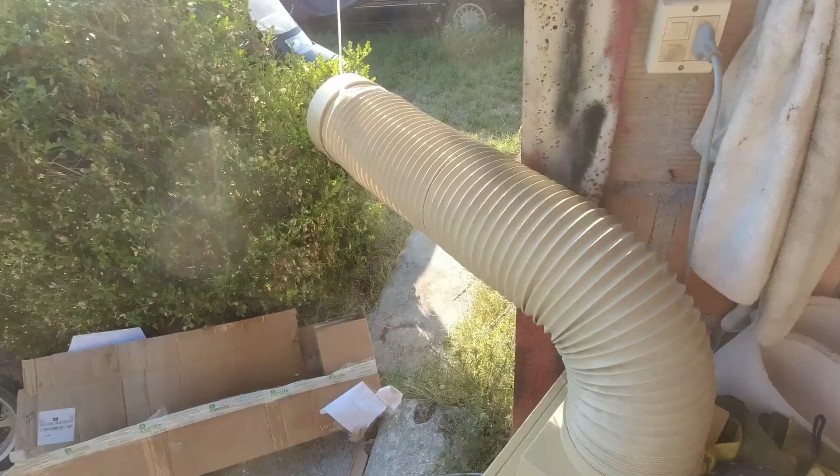This little thing here helps me cool down the place while I work, so cool. It was free, so why not?

Okay, so what we're gonna do today: first of all, a good service, because I don't know when the last one was done. I mean, I do kinda know because there is a sign in the engine bay and I'm gonna show you later.

We're gonna try to address the check engine light in the car using an OBD reader.

And we're gonna clean the interior because it's kinda clean, but it's been in the hands of the same person for over 20 years, and I don't know what it did to the car.

I won't film much of the cleaning the inside because it's pretty boring, and you already saw it in many other of my videos. So I'm just gonna tell you what I'm gonna do.

I already put that yellow device in there, which is an ozone cleaner. It helps kill all the bacteria and all the germs in there, and it erases all the odors and smells within the car. So I'm just gonna take out the seats and basically strip down everything, use the extractor, clean the seats, clean the interior, vacuum everything.

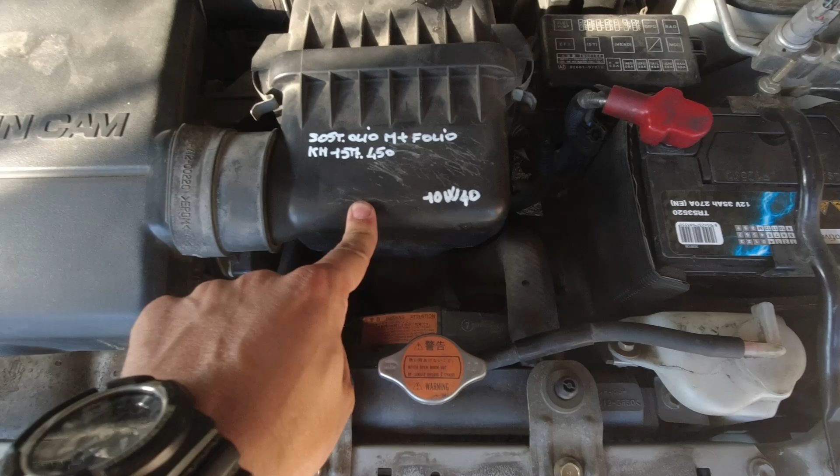Here is the engine bay. It's a little bit dirty, but not even too much. As we can see here, this is something I hate so much, seeing this stuff here.

It basically says they changed the engine oil, plus this doesn't mean anything. It's probably meant to say they changed the filter, the oil filter too. They did this at 157,000 kilometers, which is 2,000 kilometers ago, so it should be all pretty new.

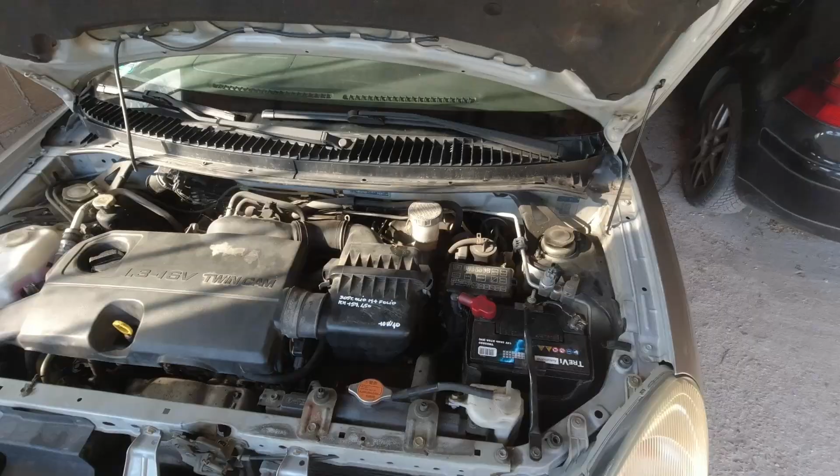Not so sure they changed the air filter, I'm not even sure. And yeah, this is the oil they used here in Italy. Everyone on every car uses 10W40. Like every car I bought, whatever the manual says, whatever it says on everything, our mechanics always fucking use 10W40. I don't know.

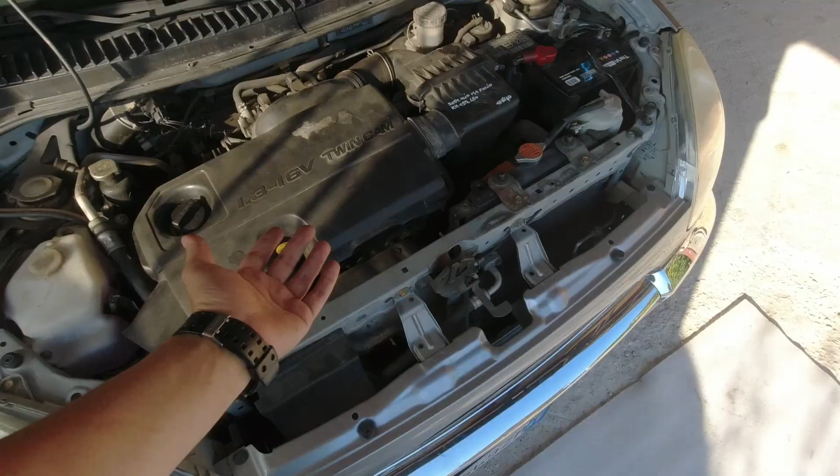It's a disease, I don't know. How much does it take in 2026 to check online which kind of oil this engine needs? 10 seconds, something like that.

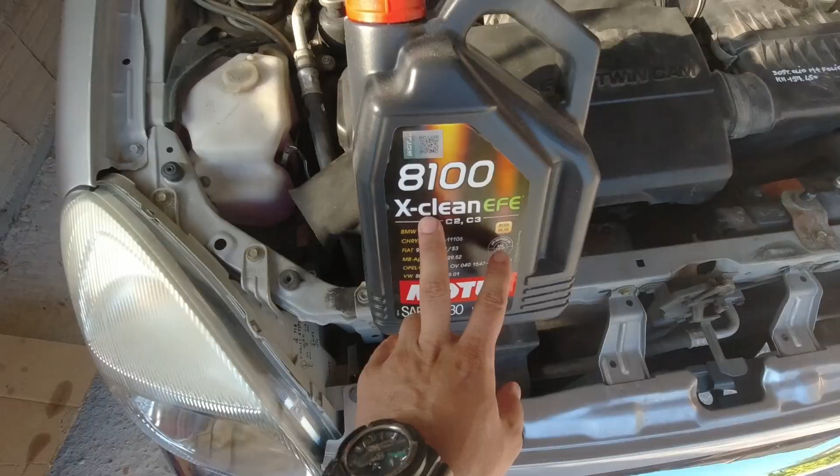So I don't know, but we're gonna change the oil. We're going for the same engine oil I use on the Yaris, which is Motul 8100 X-Clean EFE, a 5W30. I bought 2 of these, 5 liters each, because I had to do the service on the Yaris that I did yesterday.

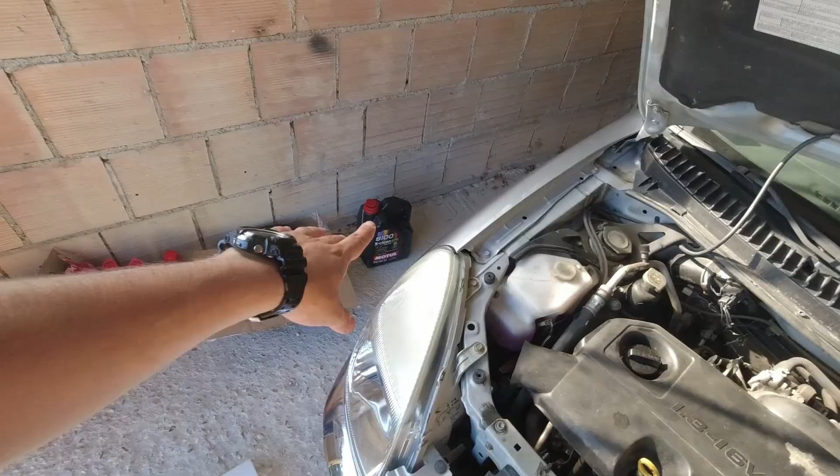Today I'm gonna work on this. I'm gonna use the oil which remains in there, plus I have another jar over there. I'm gonna change the oil, change the air filter, and change the oil filter, which is down there.

Since we are here and I didn't even jack up the car, we're gonna drop down and see how accessible everything is down here, because on the Yaris the oil filter is behind the exhaust manifold. It is very hard to get to. I hope this is better, but I didn't even check yet.

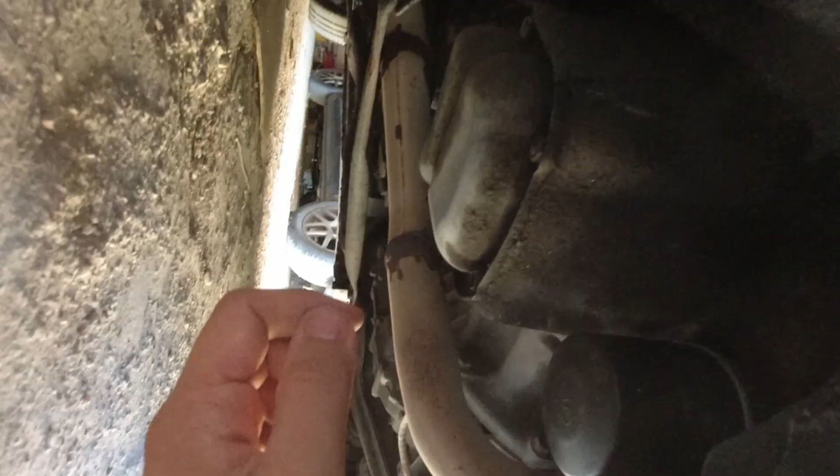So here is the oil pan, and that is the bolt, the drain plug, which is pretty easy to get to. And this is the oil filter, which is in a perfect position. I can do whatever I want with it, and I can even use a tool to take it out.

Seems very new to me. So yeah, they changed this one through 2,000 kilometers ago. The oil is draining from the bottom.

I was kinda preoccupied because this bolt, the sump bolt, I don't know, there's something wrong with the threads I think, because it was very stuck on, and I had to turn it a very long time before it came loose. So I don't know.

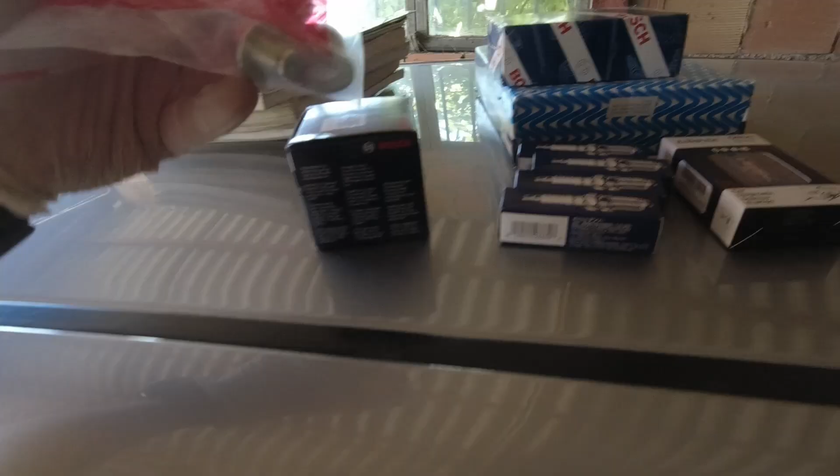Thank God, when I change oil in my car, most of the time I take these ones new. The problem probably is in the thread on the oil pan, not on the bolt, but whatever. I got one of these new, so we're gonna use this one instead of that one, because the gasket on that one is pretty shit anyway.

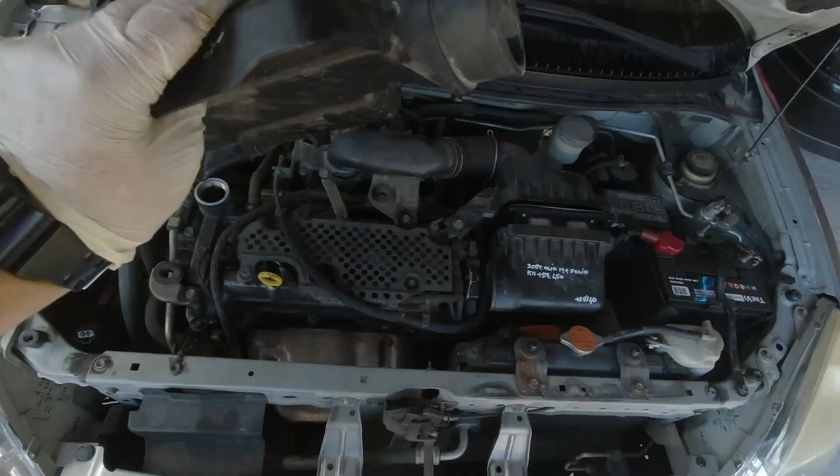Okay, we're draining the oil, and while we're draining the oil, I was able to take out this plastic cover here, which functions as an intake tube, kinda weird. And this is the situation.

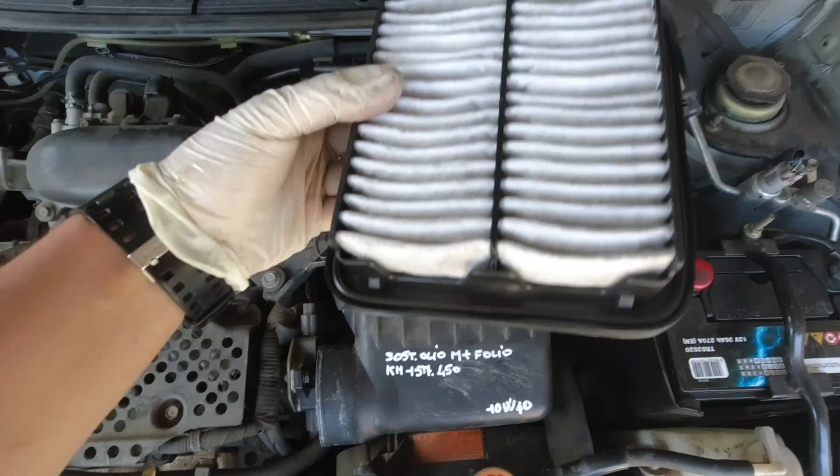I can open this now, take out the filter. Let's see how it is. Kinda dirty. Yeah, this wasn't changed at this time, at these kilometers. I don't think so. This is older.

Let's see if there is a date somewhere. 2010. So yeah, this probably hasn't been changed in quite a few years. I don't know why people do that. This thing costs like 10 euros. I don't know, people are weird.

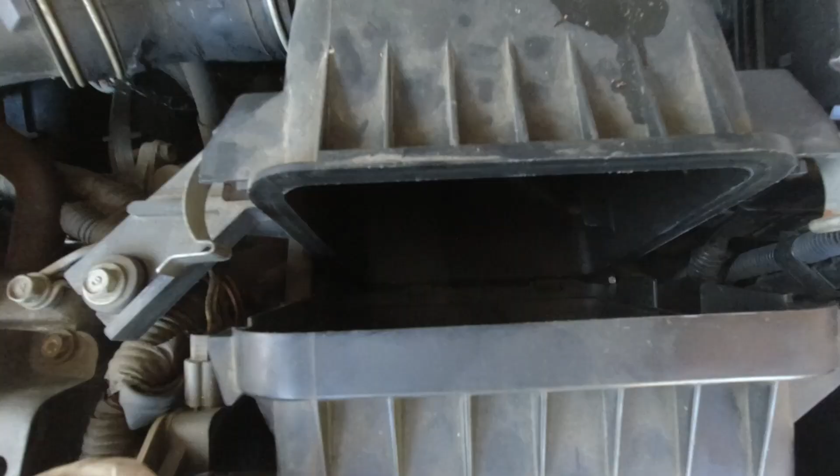Okay, so we're gonna change that. I'm gonna first vacuum in here, but it's pretty clean honestly, I don't see any debris. Put new filter here, close this one.

I wanted to change spark plugs too, but it seems quite a job to take them out. There is a broken clip here, but okay.

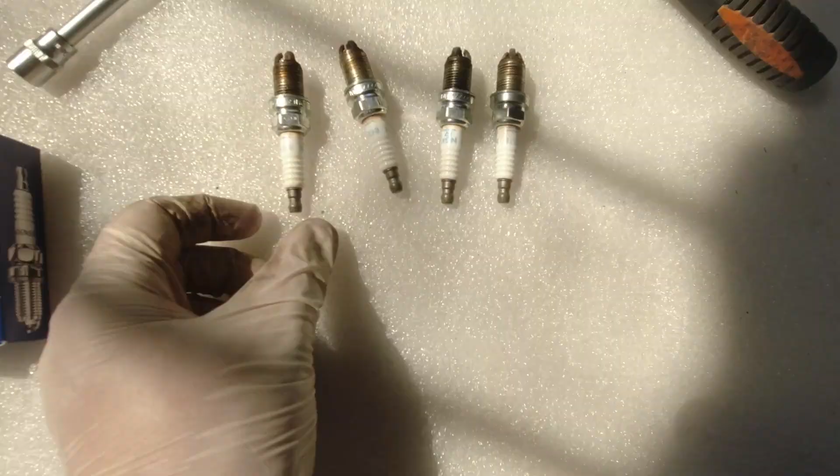Let me see if I can take this off, the coil pack, and see if I can change the spark plugs too. I should be able. Okay, I managed to take out this cover here, this plate. I took out the coil packs pretty easy, and I took out the 4 spark plugs, which are down here. They are NGK ones.

The code is right here: BKUR6ETB10. The tip is like this. This is very unusual, but I hope I got the right one.

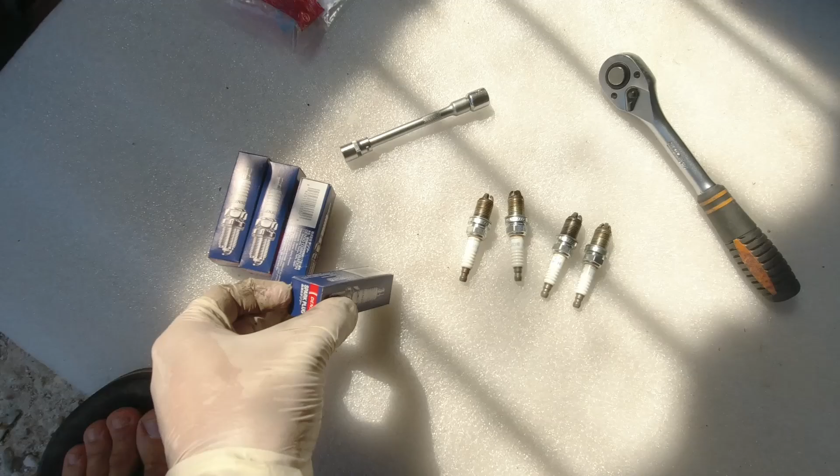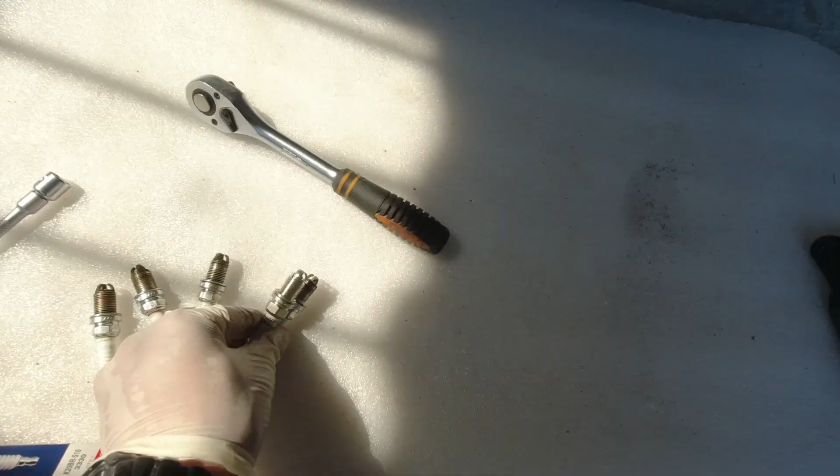I hope so, because I couldn't find equivalent NGK ones, and I got some Denso ones instead. That should be okay, the tip is the same. Let me check one to another. Yeah, the length is the same. They're the same. Okay, cool.

Got the right one. Weird thing was, when I was checking on various sites like Autodoc and etc., they told me to pick some different spark plugs. But I wasn't so sure because I checked the manuals over there, and the manuals stated different spark plugs than the one listed on Autodoc for this engine. So I trusted the manuals, the original Daihatsu ones, and thank God I did, because these Denso ones are the right ones.

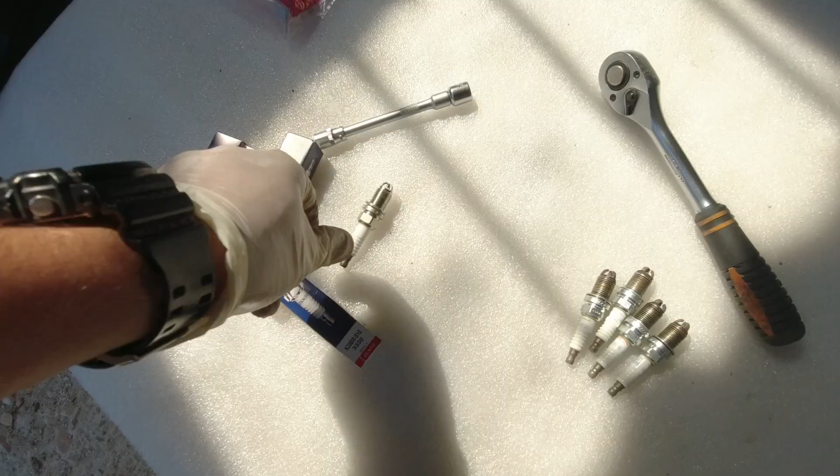Cool, so I'm gonna put the new ones in, and we're gonna continue. So guys, I had to raise the car a little because I needed more space down here, down to this oil filter.

An oil filter in this position should be so easy to access, right? And it kind of is, you just need to screw or unscrew it. But the mechanic that fitted this filter tightened it so freaking hard I had to destroy it to take it out. I don't know, mechanics that tighten oil filters to this level need a special place in hell.

While I was under here, I was seeing something weird up here, white, and I reached out with my hand and a screwdriver to help me. And what the fuck did I find here? What is this?

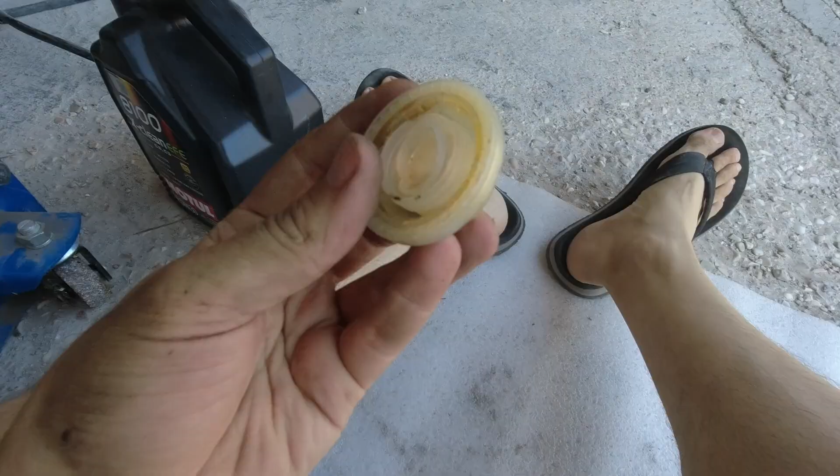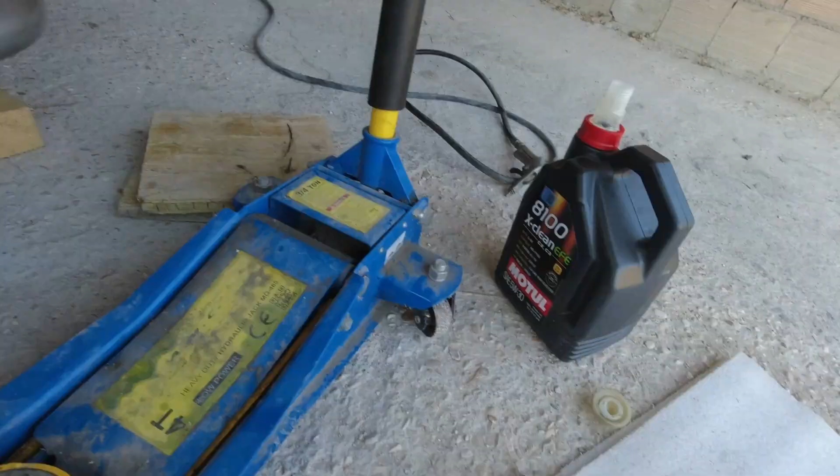Looks like some cap for an oil tank, something like that, I think. If you do a service on your customer's car and you drop the oil cap behind the bumper, what about taking it out? Huh, too hard, right? I did it in my driveway with my back on the ground with like 30 centimeters of space. Imagine doing it on the lift, how hard would that be, right?

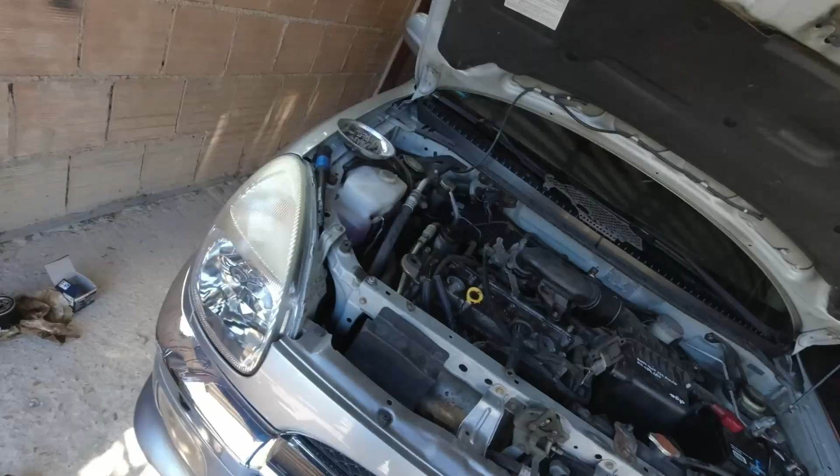Okay, since we're talking about weird things and weirder things I'm finding on the car, this is something very strange. It never happened to me before.

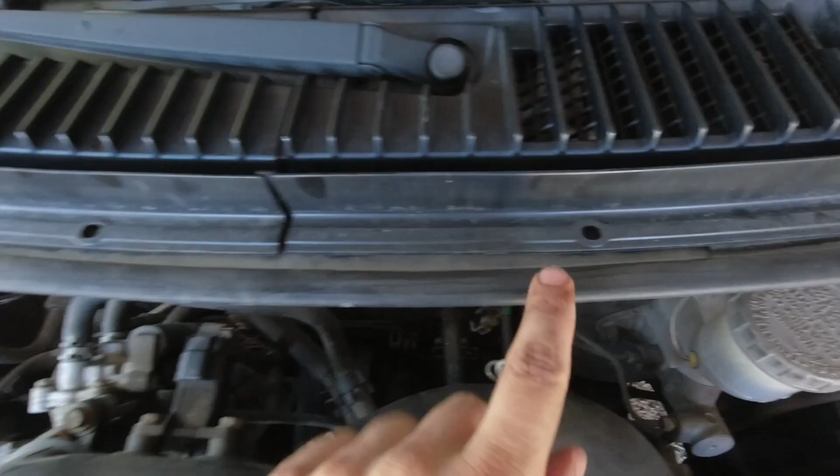Do you see these two covers? The cover is divided in two parts, first of all. As you can see, here it's divided. I was putting that there and I saw it moving, right? Do you see it moving? Then I said to myself, what the fuck is happening here? And what's this stuff here, dude?

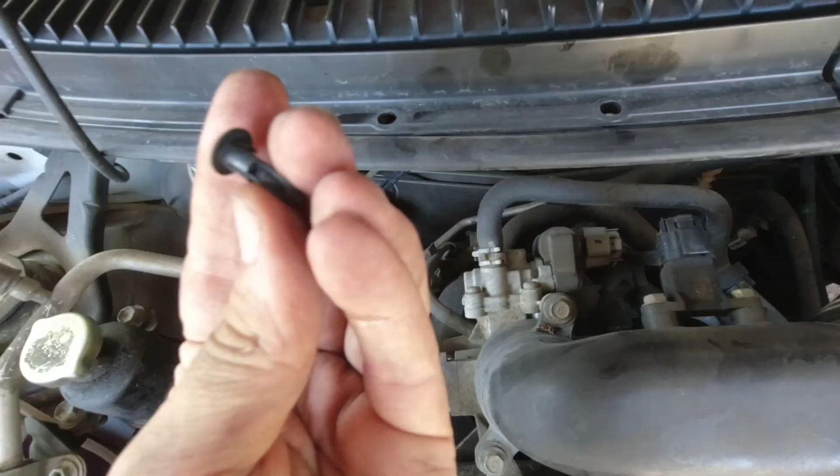I mean, there's no clips, even back there. What the fuck? What the fuck happened here? There are like 3 clips holding the whole thing. Why? I mean, if you take it out, put them back, it's not that hard, right? Even the ones that are in are destroyed. These are useless. What's this stuff?

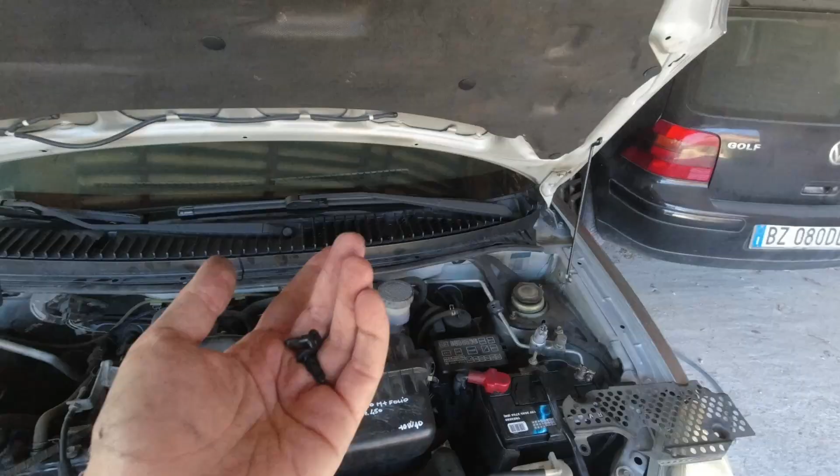This thing is flying. I don't know, dude, the more I look into the car, the more weird things I find. I kind of like it, because I'd like to move more stuff and see more weird things, I'm curious. But I'm also scared, because Daihatsu here in Italy are sold no more, so finding this stuff will be a nightmare. I can try some Suzuki parts I had for the Swift that I bought when I took out the carpet, some of them broke and they're kind of similar, but I don't know. I can try some Chinese ones, but they last like 2 days before they break.

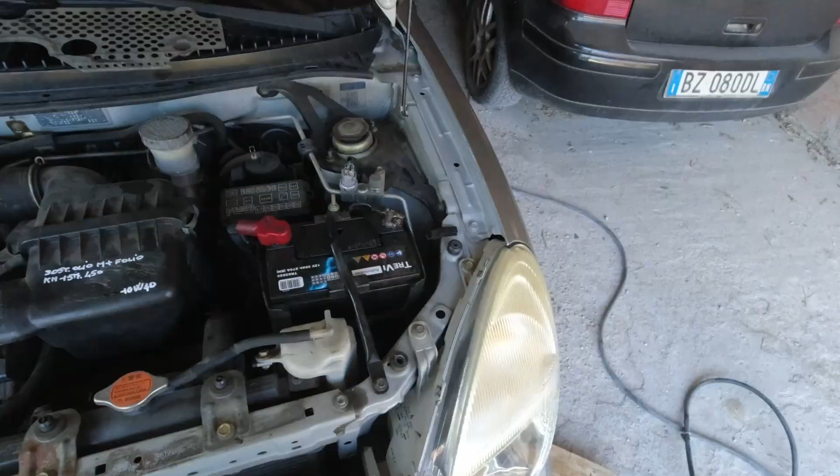And now that I watch all this kind of stuff, the ABS sensor and the check engine light, I think there's not any major issue with them. It's just something weird happening here.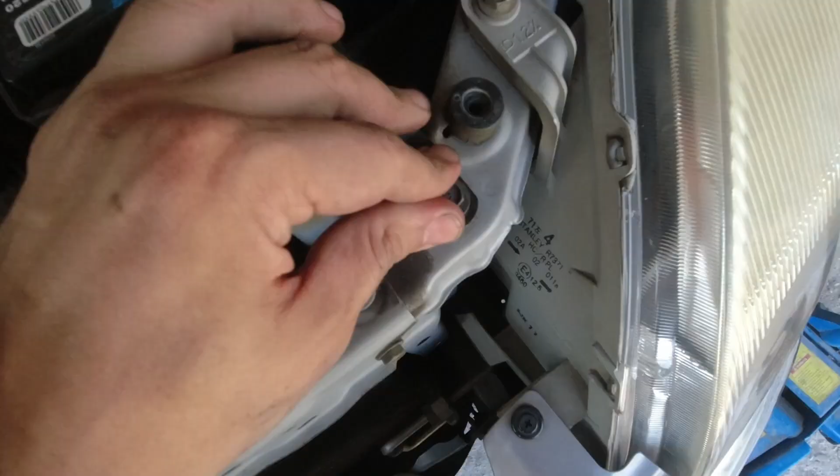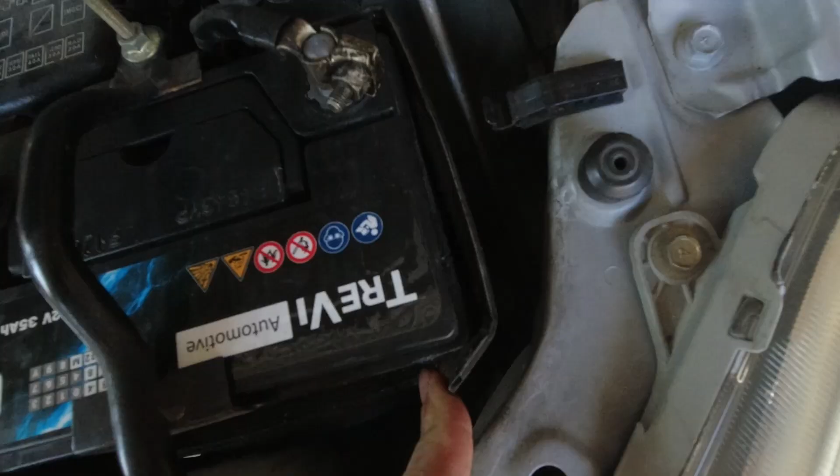For example, the dude, before buying the car, he changed the battery. Look at this thing, fix it for fuck's sake, fix it, turn this fucking bolt, fix the fucking battery, dude. What's this? Do you see the cover of the battery all around? It's plastic with foam. I don't think this is Daihatsu, I don't think so. I'm pretty sure this is some kind of weird stuff the previous owner put in, don't know why.

I need to find out what's happening here. And the ABS light came on. I talked with the previous owner and he told me he changed the battery the day before I got to pick up the car. He changed the battery, and when he turned on the car, the ABS light popped up for the first time ever, it wasn't there before. So I don't know what the fuck he did.

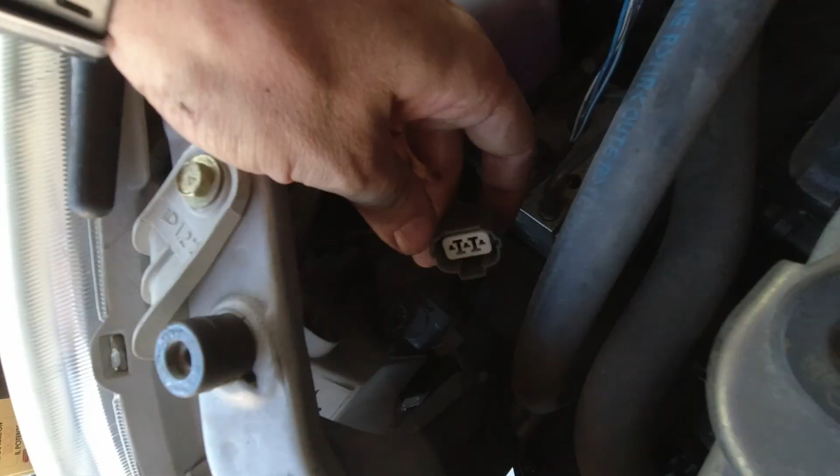For example, look what I found here, a connector disconnected. Why? This is a headlight, yeah, it's the motor for the headlight. Why is it disconnected? What happened here? This is the ABS control module. So I think someone messed with it, I'm pretty sure something happened here.

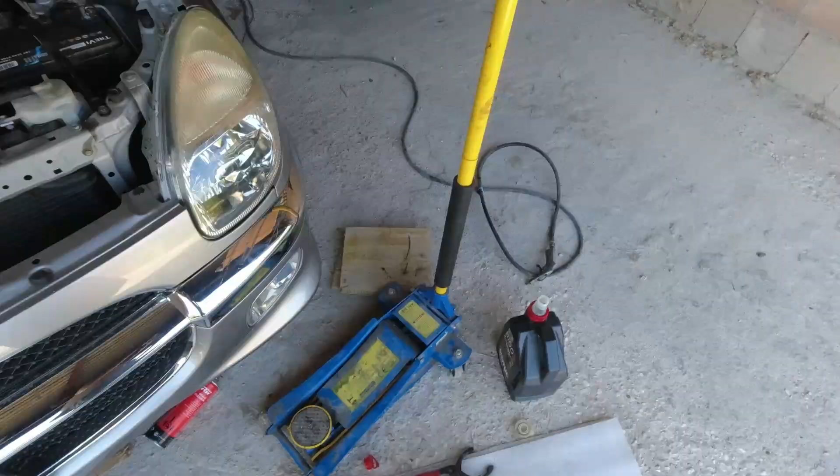And really, I'm scared to look around the car, because I'm pretty sure I'll find more weird stuff.

Quick update, the engine is turned over. I let it warm up a little and checked the oil level in a few minutes, it was about to full. But as we can see here, what the fuck? The ABS light, which was there, disappeared.

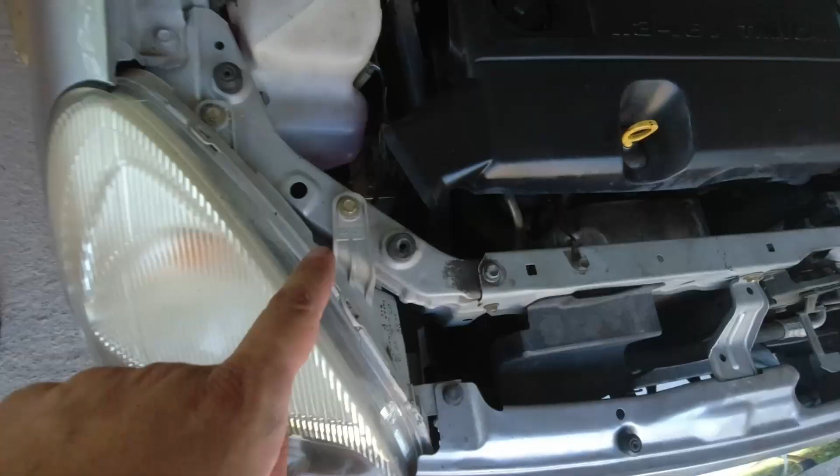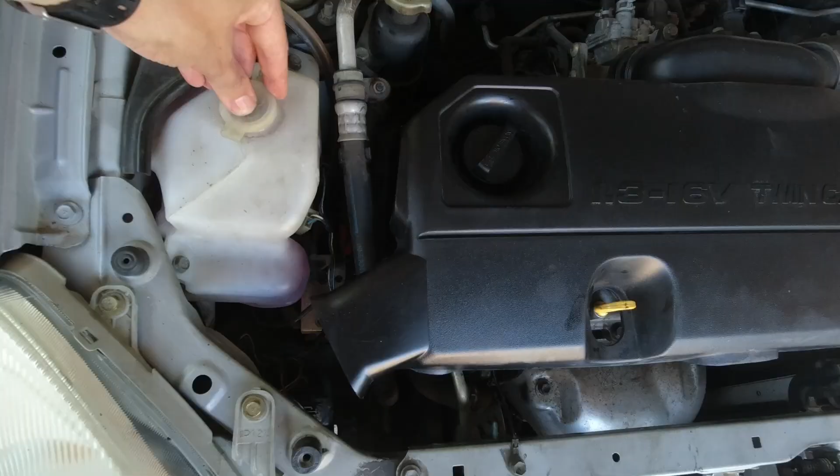I'm confused, I'm really confused, really. Could it be the connector there, which was disconnected? But I'm pretty sure that goes to the headlight, so I don't know. Now that I think of it, the dude who sold me the car told me he filled up the washer fluid bottle. So that connector was right there, he maybe put something in and accidentally disconnected it. I don't know, maybe that's the case, I don't fucking know.

Let's give it a rev.

So smooth, this engine. I keep an eye on the ABS light to see if it pops up again, but for now we consider it fixed.

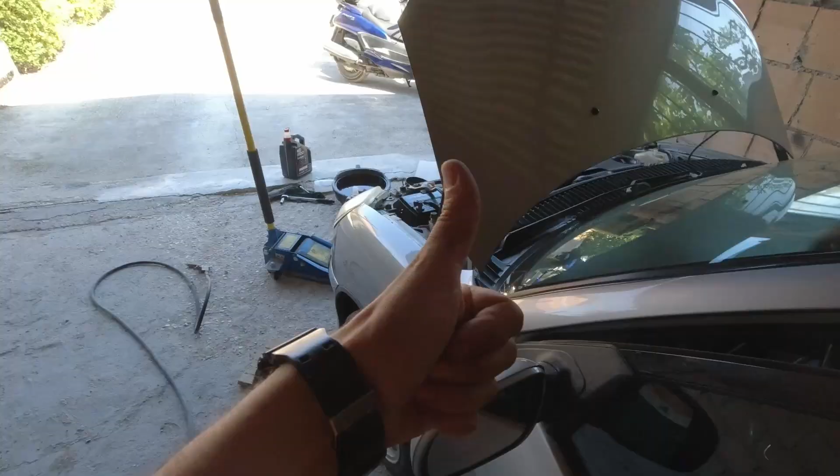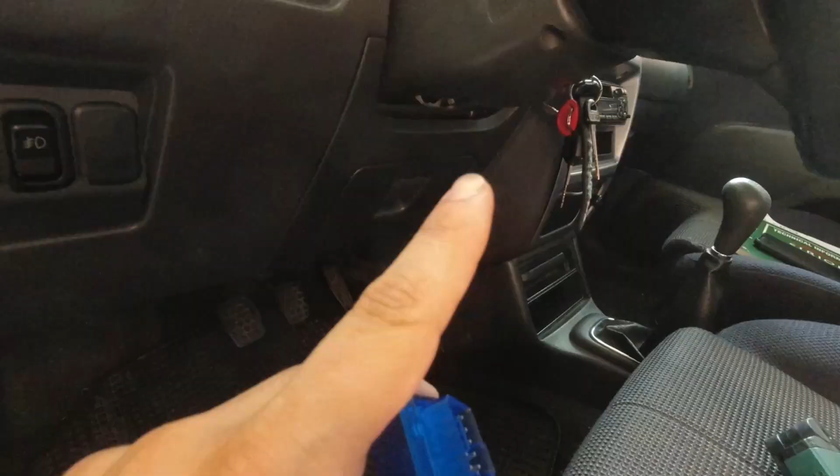For now, we're here to connect this cheap OBD2 sensor, or to be precise, OBD2 reader. We connect it to the OBD2 port right there, turn the key on, and check with the app on the phone what it's telling us, if it tells us anything.

This was bought on Amazon for like 10 euros. It was the cheapest one because I'm that cheap.

So the OBD2 port is located down here. Let me get some light. It's like down up there. I hope you can see it, like here.

So I'm gonna just connect this to there and see what's going on. This is the app, gonna open it up. Okay, it's ready to be connected.

Now I just need to turn the ignition on. Then we hit connect, I think. Yeah, Bluetooth on. It's trying to connect. It did connect.

Okay, now we got a few options here. We can try with the diagnostic, which is this one. We take all this stuff off, I think, and we go only for OBD2. I don't know what all this other stuff is.

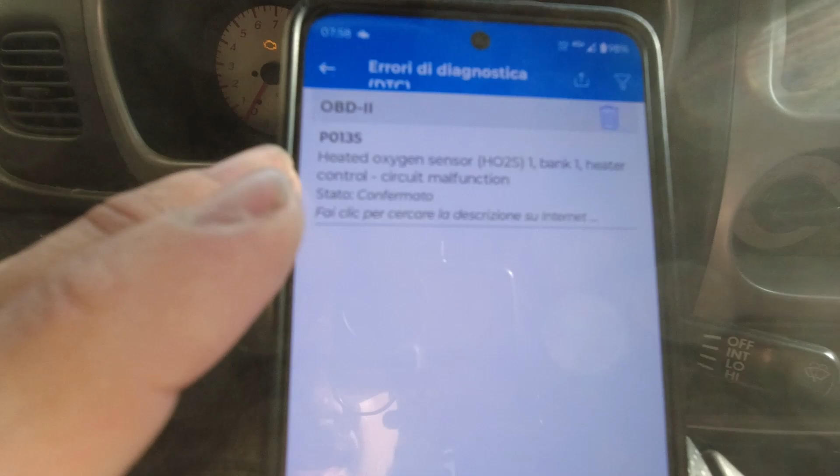And we just go read. Let's see if it finds anything. It found something. Code is P0135, heated oxygen sensor 1, bank 1, heater control circuit malfunction, confirmed.

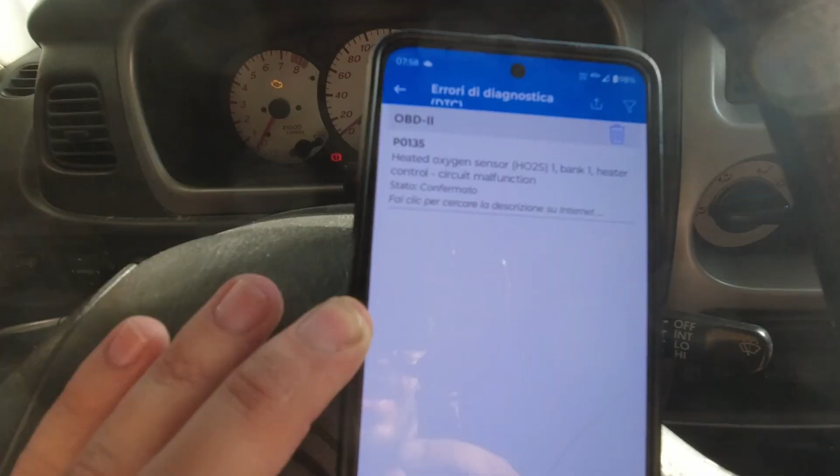So we got this code now, and you can look it up through the app, but we can also check the manual if something is related to this code here, and we go from there.

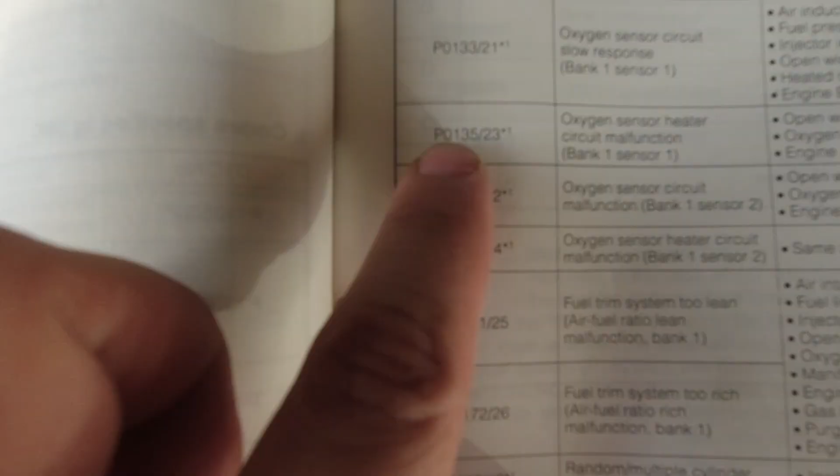This is the official workshop manual. We've got the various codes, and if we scroll down and find that code, P0135, as we can see, it says the same thing: oxygen sensor heater circuit malfunction, bank 1 sensor 1. Open wire or short in heater circuit of oxygen sensor heater, engine ECU.

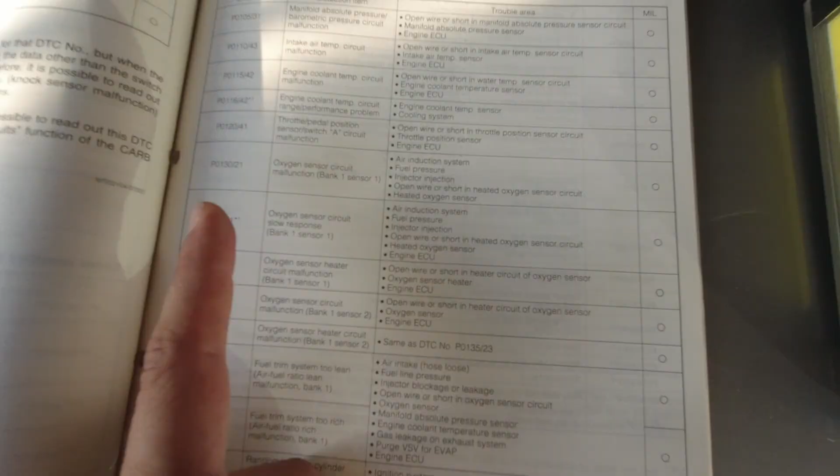Although we can write off the ECU, because everything else works, so I don't think the ECU has a problem. It's probably just the sensor or the wire.

As we can see, we have two oxygen sensors, bank 1 sensor 1 and bank 1 sensor 2. Ours is sensor 1, which is the problem.

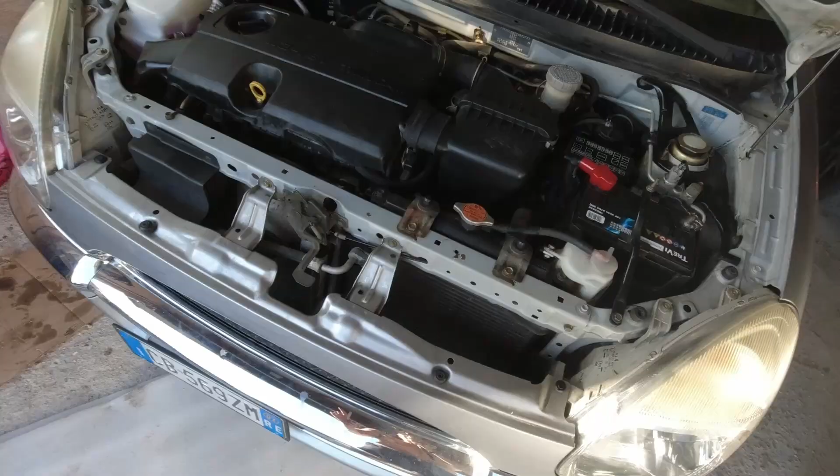I'll show you why. We're here in the engine bay again, and I'm gonna show you the O2 sensor I already found, which was the one down here.

I don't know if you can see it, it's right there. This is the wire. This isn't too bad to work on, but I think, since I can't see anything after that, this is sensor number 2, which is not the one that's faulty.

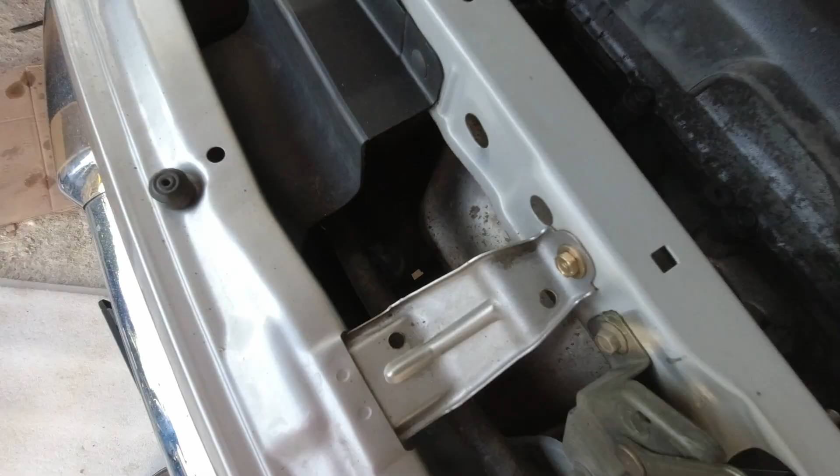The other one should be before that, and I think I saw a glimpse of it. I don't know, but I can see the wire here. Let me put some light. The connector is there, this is the wire, and the O2 sensor, I'm touching the wire, is down here under the heat shield.

Now I don't see it, literally. I can't fucking see it, but I can feel it by hand.

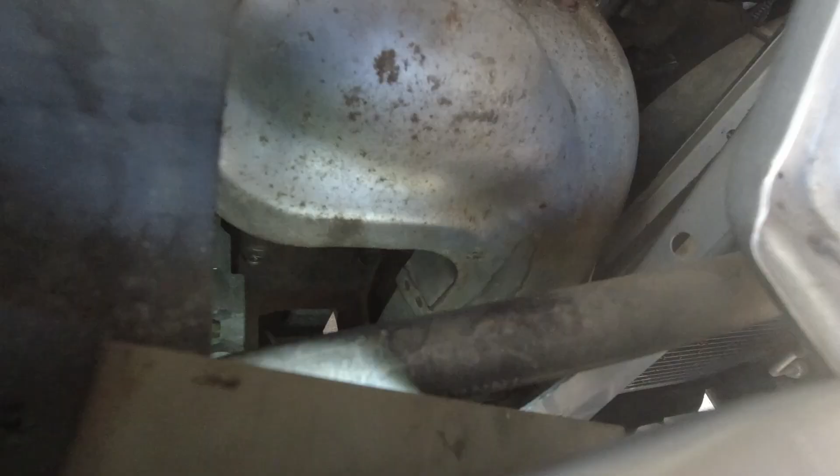Now the real problem is, how the hell do I take it out from there? Usually these things are really stuck on, because they went through a lot of heat cycles, and you've got to have a lot of access and a big ass wrench to take them out. That tight spot there will be a nightmare.

So what's the plan here? I fear that my only option is to take out the bumper to get some space, because I can't get there from any angle.

I mean, here I've got the grill, the bar, this plastic shield, heat shield, AC lines, more lines, the alternator I think. So I literally have no space, and I can't see it.

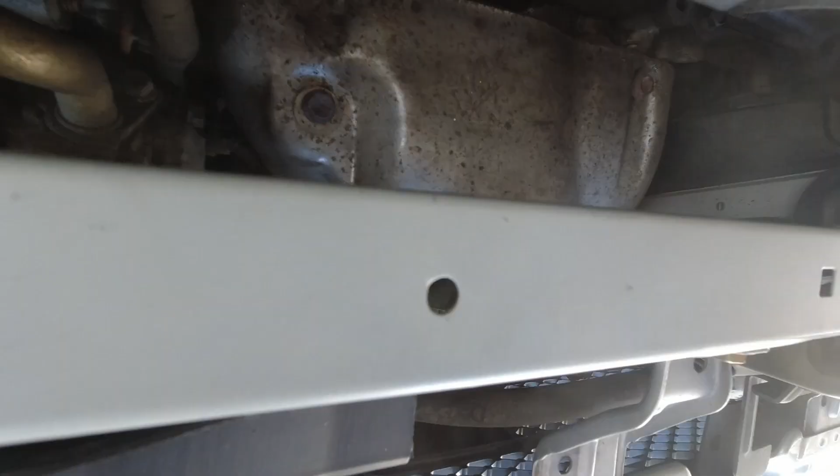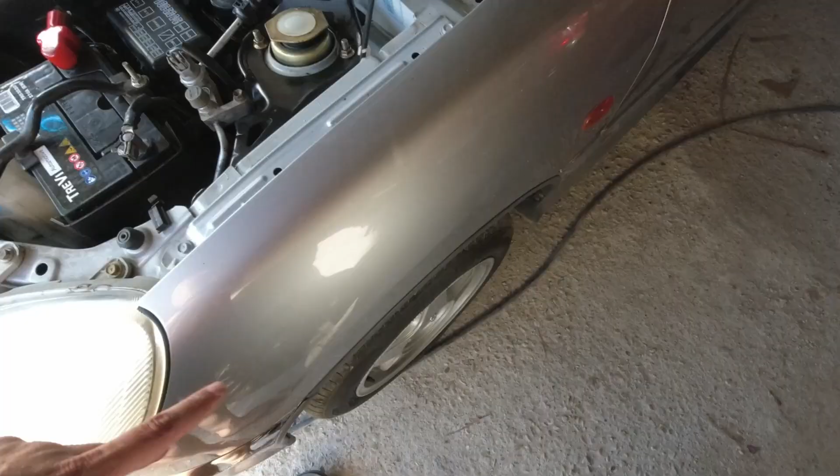So I don't know, so what I'll try to do is take out the bumper. I can only see some bolts here, here, here, here, and it should have some on the bottom. I sense some screws in here. So I'm just gonna try to take all these bolts and screws out and take off the bumper, and go from there.

Okay, so I took out these two clips, which are different from one another. Nice, these two bolts. There is another one down there, very deep inside. Then we got some clips from the bottom to secure the bumper to the chassis, but as we can see, since this bumper got taken off a few times, don't know if you can see here.

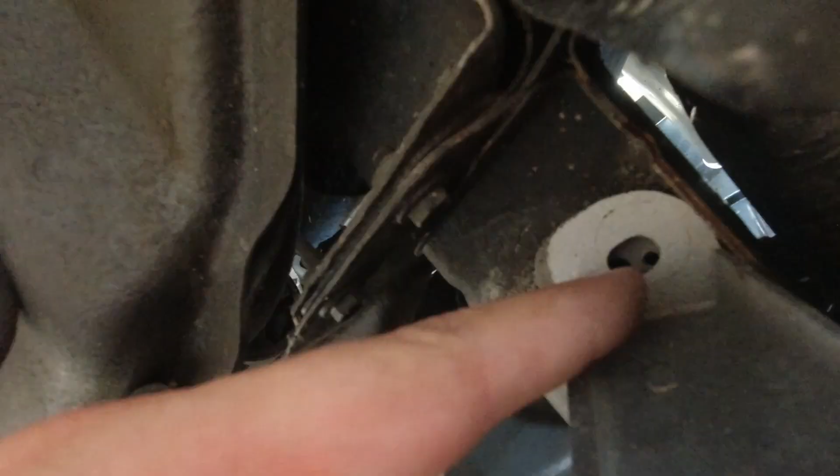If you take this out, you can see there is a big hole there, which lines up to this one. There should be a clip here, right? Guess what? There was this fucking self-tapping screw, which I think the previous mechanic or body shop guy broke or lost the clip, I don't know. Their first thought was, let's just put the self-tapper and we're good to go. Fucking nice.

Someone did it on the car. Pretty sure on this other side is the same. Let's work together, let's find it out, what the fuck is it? Yeah, same story, self-tapper. What the fuck?

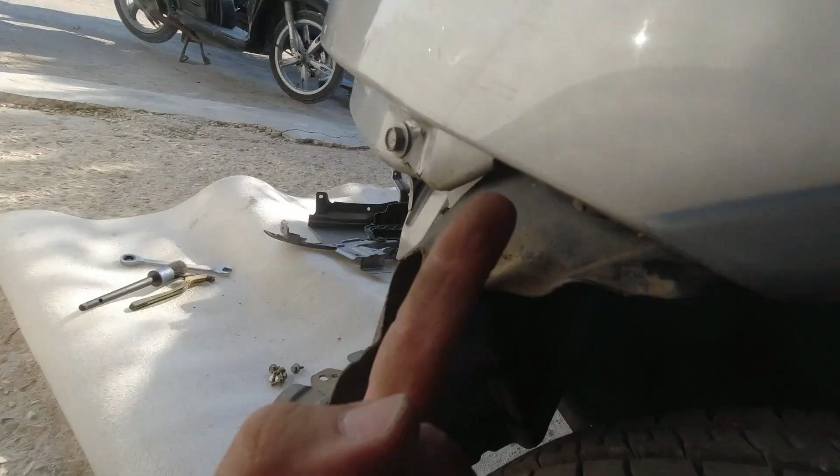Little update, everything is off from the front. The bumper had some screws that would screw right here, so you just have to move this guard to the side and take the bolt from the bottom. You don't even have to take out the wheels, which is cool. And then it basically slides off, that bumper there.

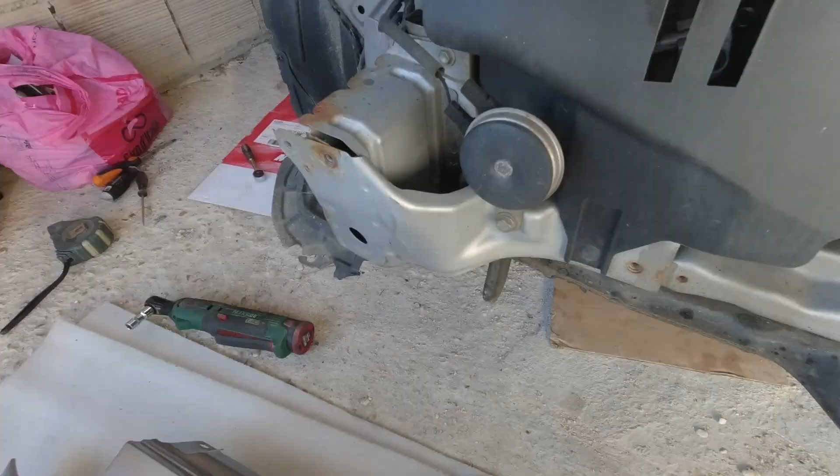Then you got this other part here, which is steel, I thought it was plastic. This one has 1, 2, 3, 4 bolts, like here. 1, 2, 3, 4, and 2 to the side. You can see one here and one to the other side, and you just take it off. That easy.

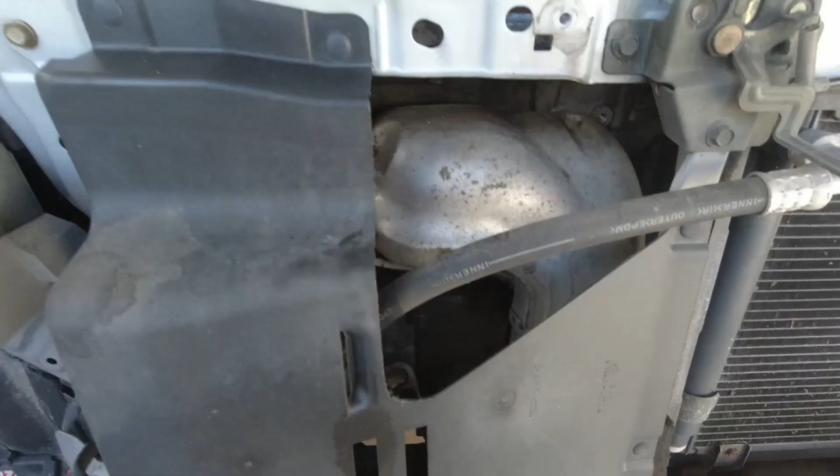Now we finally have way more space to work. Now I can see the lambda sensor, which is there, which is cool. I'll try to take this thing off so I can have more space, or I just have to take these two here and pry it open, and then we try to take that fucking O2 sensor off. Connector is there, very convenient.

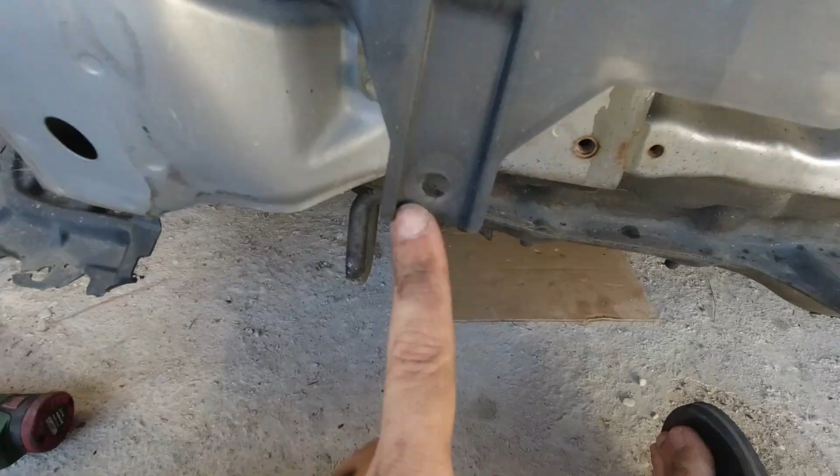Okay, I had to take off these two clips here and this one on the bottom so I could slide these off open. Now we can have access to the lambda, that's the connector, I'm gonna clean them. Now I was worried to take out this one, but honestly it went out pretty easily. As we can see here, I don't know if you can see it, but it's a Denso sensor. We have the code, it's pretty dirty, but could try to clean it, but I'd rather change it anyway.

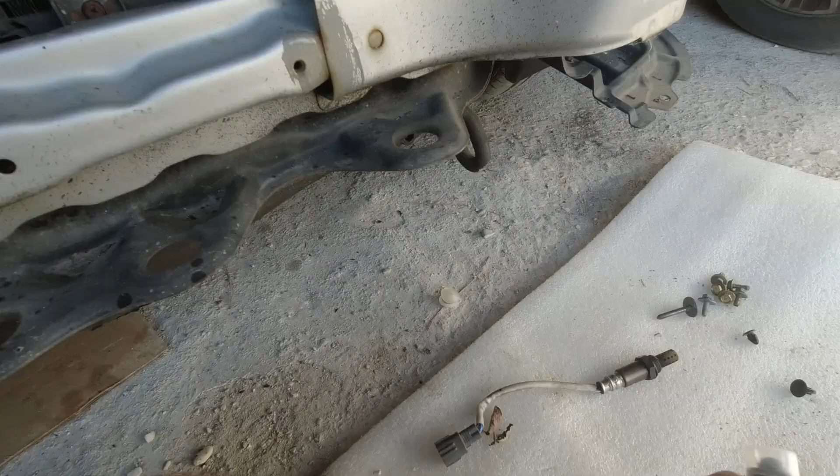You got an equivalent Bosch one, I think. It has a longer wire, but whatever. Should thread in, it has the same thread, a little bit different, but I hope it works even better. This one I think has been there for like 24 years, so it was about time to get it changed. Okay guys, since I'm here, the festival of oddities continues.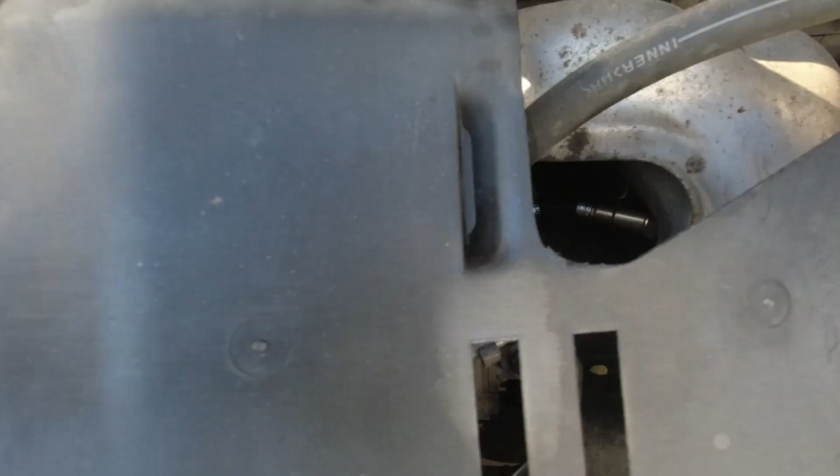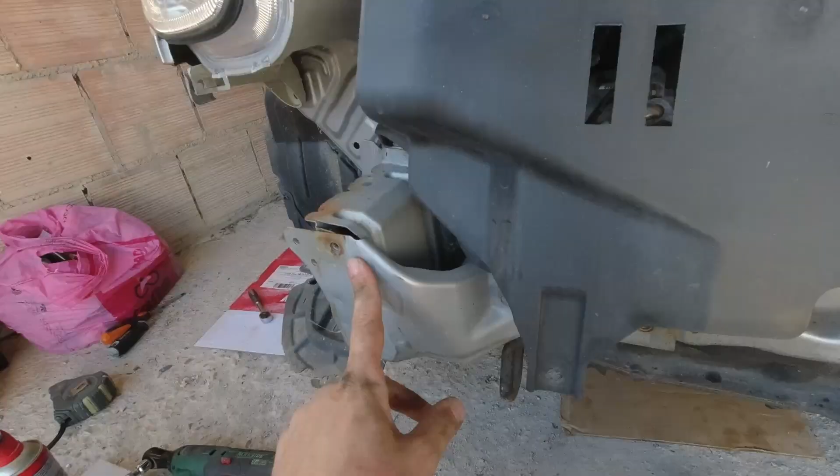I was here, right? I was watching this thing and I was seeing some sign of superficial rust, right? And I asked myself, why isn't this one like this? It shouldn't be similar, it should be, right? Then I noticed that these two sheet metals are separated, right?

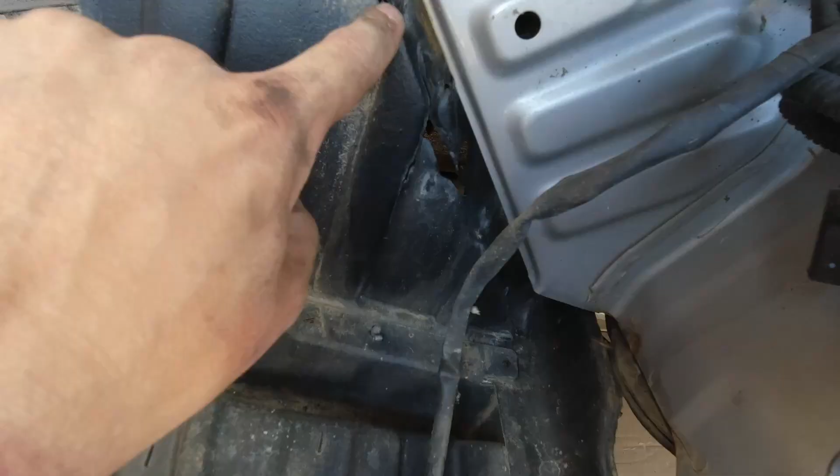Then I watch here and I see some cracks, some bends, and I see this wing here which is bent, right? Here is all wavy, and I don't know, seems weird. And if I watch here, this one is destroyed here, okay? And if we see the bumper on that side, there's a huge scratch here, and this headlight is all brown inside.

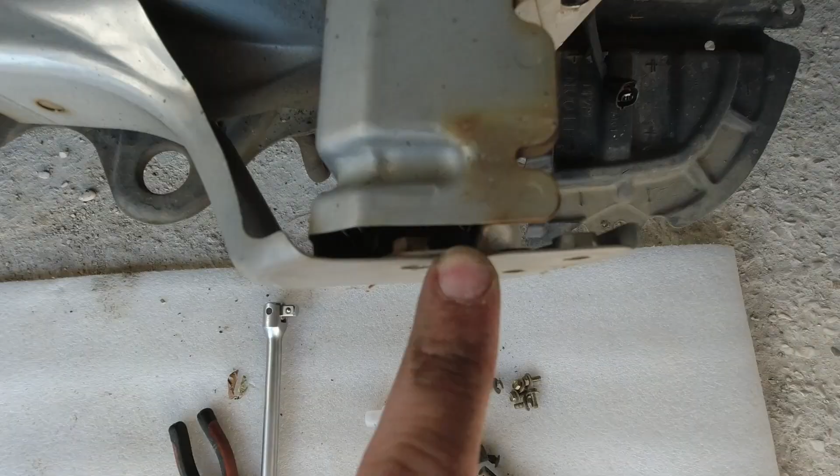So I was wondering, watching it from the top, and then I compared to this one. You see any difference? Here we have no space between the two sheet metals, and this wing here is straight. So this guy,

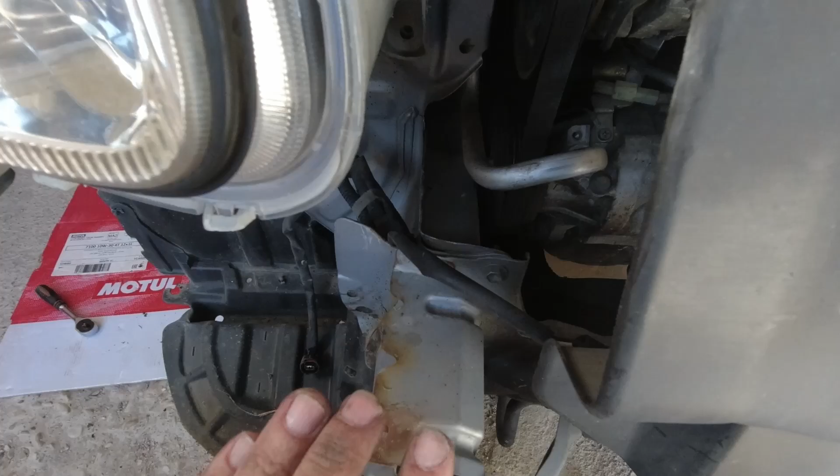if we look at it from the top, is pretty straight, right? This one is pretty straight till here, then it bends slightly on the left up here, just this piece here, just the crash bar on the top. I think the chassis legs are okay, they seem straight to me, but this, I don't know how you call it, crash bar, I think this one is bent.

So this guy here had an accident on the front, on this side. He probably went, I don't know, it's nothing too major because nothing else is broken, nothing else is bent. It's just down here something hit and bent all this part and probably went through and destroyed this thing here. I think something like this happened.

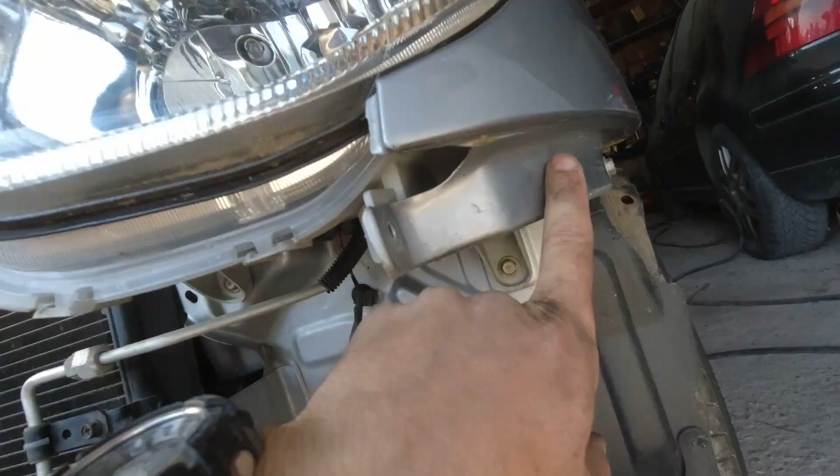I don't know, this seems resprayed. Let me see on the other side if it's the same. Yeah, as you can see, this is not resprayed.

So I think this car had an accident on this side in the past, and obviously the seller didn't say anything. Yeah, I know it's not his car, it was his uncle's car which died, so he probably doesn't know everything about the car, but this wasn't a simple little crash. This was an important one, I think.

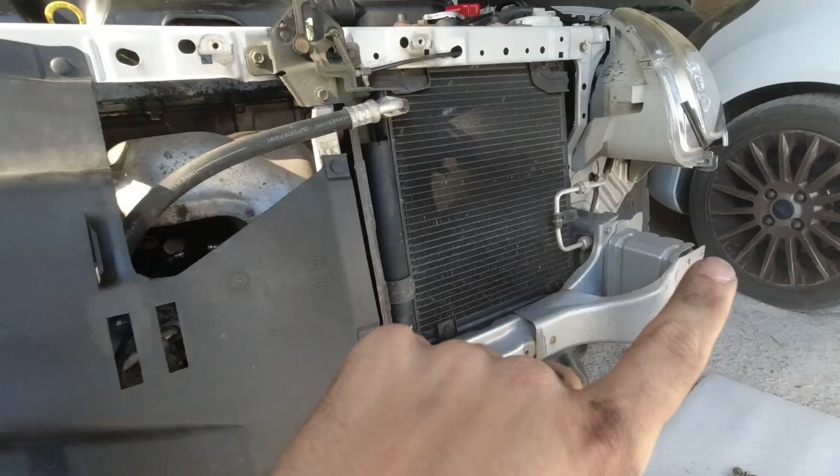Probably broke the wheel, probably broke some part of the suspension here, and that's why the bumper was taken off, and that's why we have all these different clips, screws, and bolts everywhere, because people can't do their jobs.

And we can see another thing here, the headlights. I don't know if you can see it. Let me show you. Do you see that wavy thing right there? That's a plastic weld. Someone plastic welded the headlight, and obviously forgot to put a bolt in it, because why not? What's the point of plastic welding this thing and not putting a bolt in there?

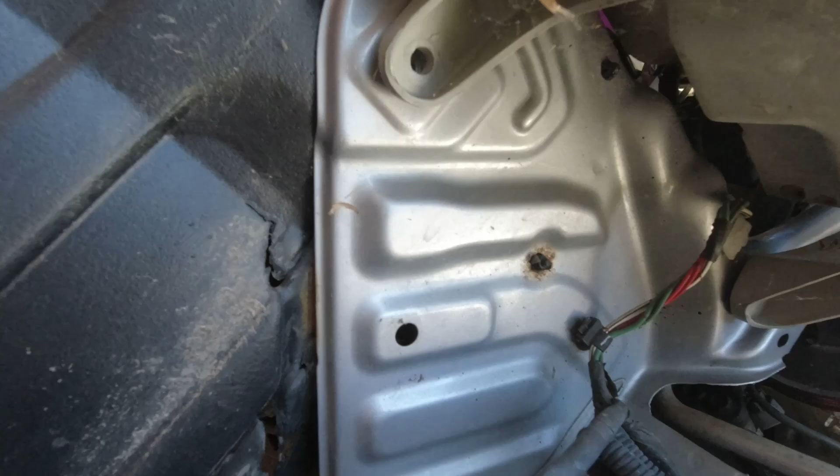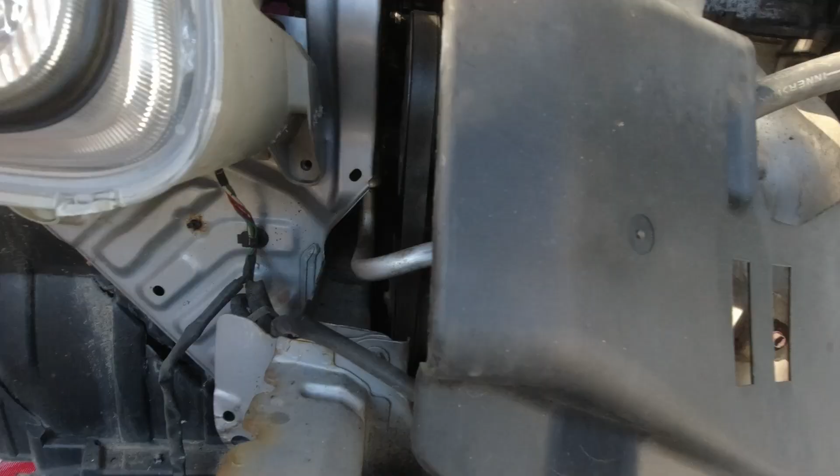I don't know, dude. Same here, look, no bolt. Yes, bolt. So I don't know, the more and more I look at this car, the more stuff I find. It's entertaining, I'm gonna say, but I hope I won't find anything suspicious.

Moment of truth. You're here with me to witness if we solved the engine light problem. Let's hope it does. Oh no, it stays on. It stayed on. I think I'm gonna try to reset the code first, because maybe it's just that.

I resetted the ECU, so let's see what's going on. Everything pops up. It's still on, but let's try to turn on the car, I guess. Let's go! Let's fucking go.

Oh, thank God, thank God. No more lights on the dash. I'll leave the car on for a few minutes and see if it pops up again. So yeah, the car seems fixed, so good to know.

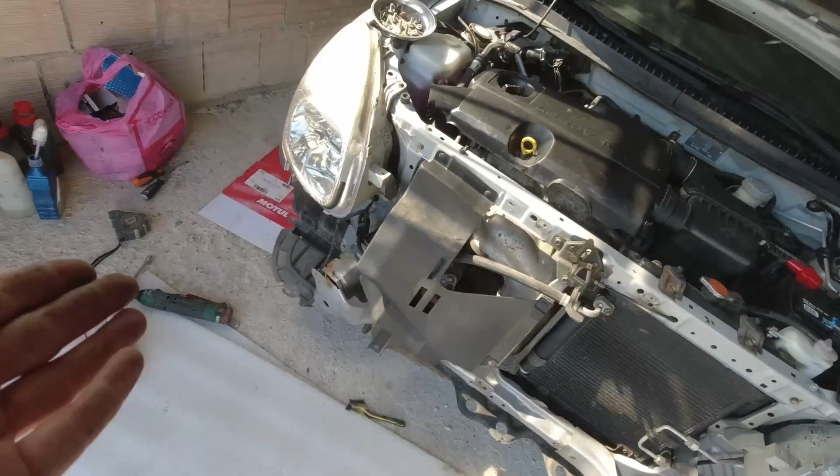The service was done, and yeah, we found a lot of stuff which shouldn't be there, and we maybe found a bent chassis, which is very cool. But yeah, all in all, it went pretty well, aside from these bad news here and there.

But I guess when you buy a car this cheap, you can't pretend it to be perfect. 1,000 euros. Yeah, it was a one owner car, but you never know how that owner treated the car. Honestly, aside from that and random bolts here and there, everything else seems almost alright.

Random screws everywhere, like those. There are so many random screws. I think the guy that owned it just repaired it himself with random stuff.

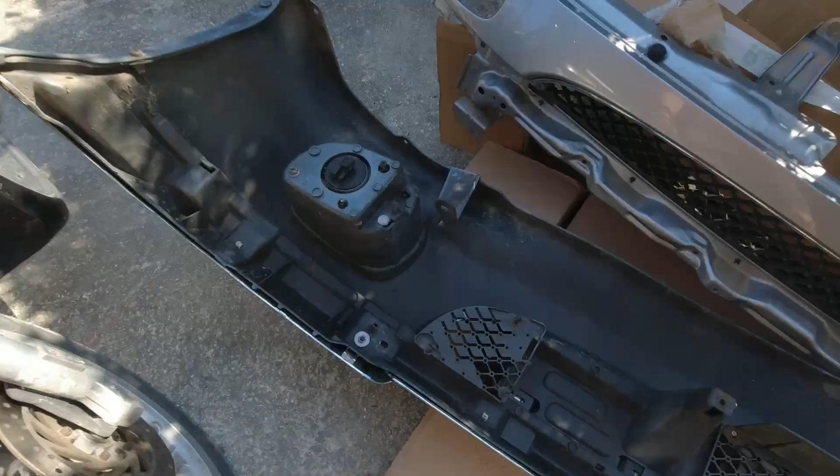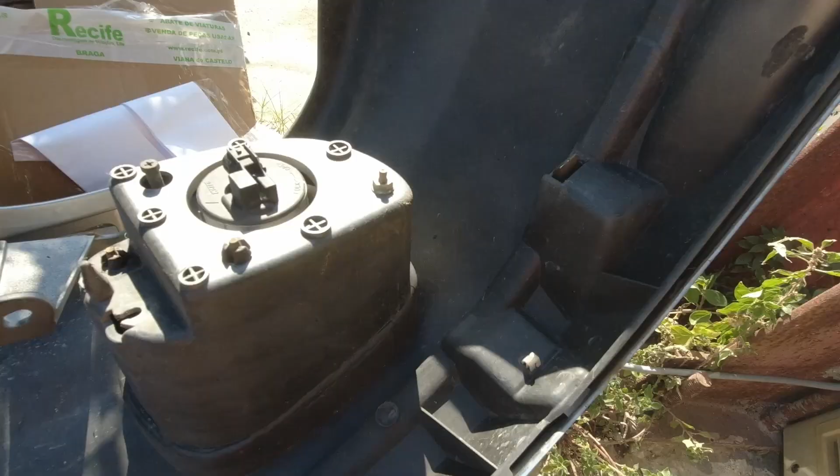For example, here, as you can see, do you see these screws? What the fuck? Probably broke during the crash, because as you can see, even this thing here is broken. Look, what the fuck? It's not even holding anything. Did you see?

So yeah, this car got a crash, but this is the wrong side actually. This is the other side. Holy fuck, the more I watch this car, the more stuff I find.

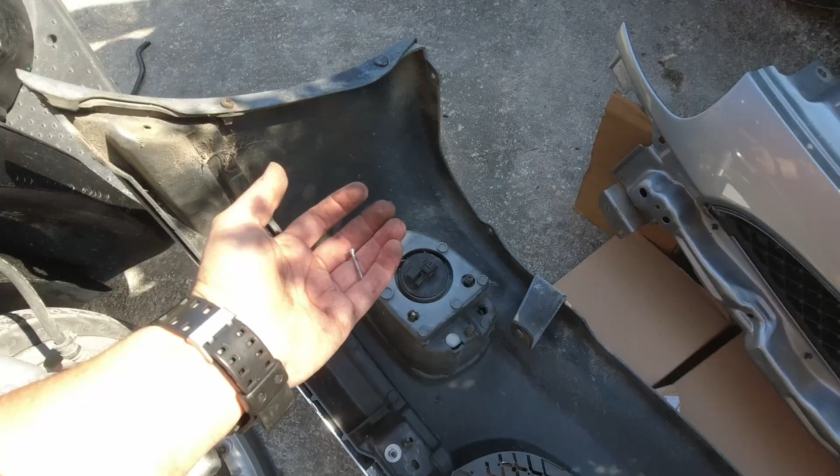Okay guys, hear me out. I'm not gonna touch anything else because I'm scared to death. This is a trap, this car is a trap. Gonna remount everything, pretend I didn't see anything, and just daily it as it is.

Because it's pretty cool, okay, it's pretty fine, the car is fine. Yeah, I got a spoiler there to mount, but I don't know if I want to do it now. I'm scared, because if I drill this, I'm pretty sure I'm gonna find some issue in here. I'm sure. 100% it's gonna be a problem there too.